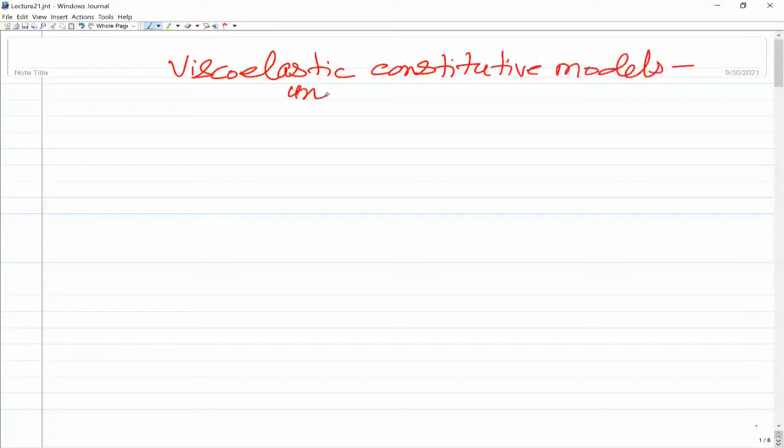Viscoelastic constitutive models, and this we will do for uniaxial state of stress. And then of course we will generalize it to the three-dimensional case.

So the simplest model is what is known as the Kelvin-Voigt model. The material is there as it is. These are different models that are available, and we can use for the simulation. So first is this Kelvin model.

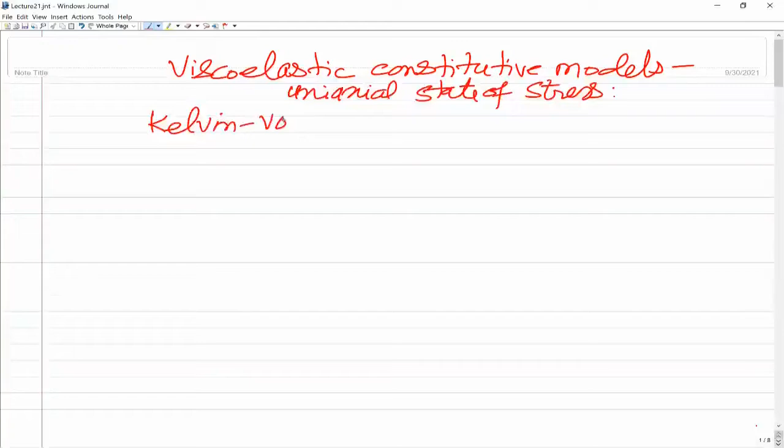Sir, are these based on experiments? Yeah, yeah, ultimately yes. You have to predict correctly the creep behavior along with the stress relaxation behavior. So people have proposed different models, and which model can predict what accurately - the final choice of the model is based on the experimental comparisons.

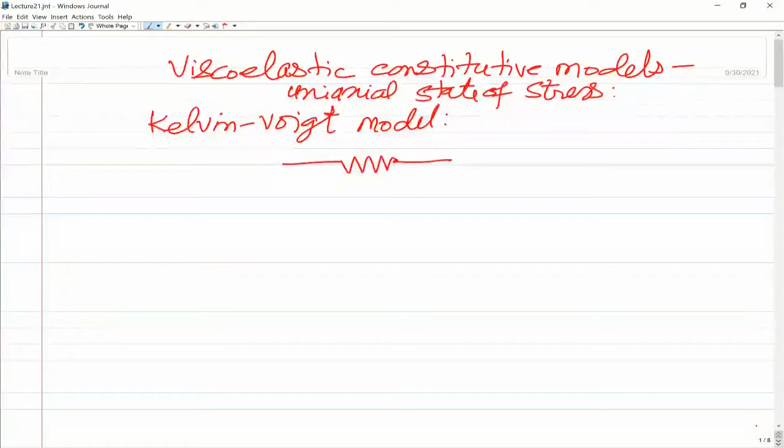So in this model, what is proposed is that you have to have basically the elastic part in it and viscous part in it. The elastic part here is represented as a linear spring, and the viscous part of the behavior is represented by a dashpot, a linear dashpot. So in this Kelvin-Voigt model, the spring - the elastic element - and the viscous element, these two are taken in parallel. So it is assumed that the material behavior can be represented by these two.

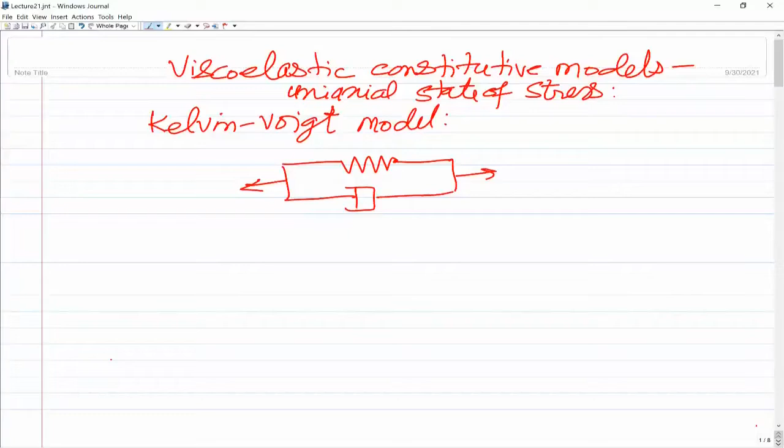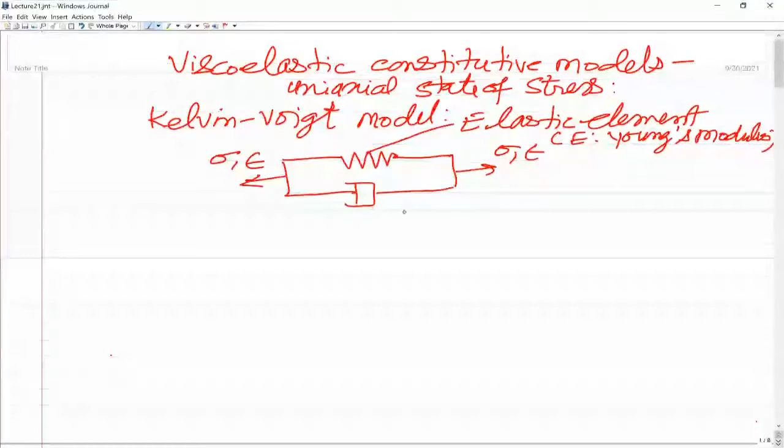So there is a uniaxial state of stress, I'm denoting it as sigma, and the corresponding strain as epsilon. This is the elastic element, as I already said, and let us say the Young's modulus is E. Young's modulus is E for that, and this is the viscous element. Let us say the viscosity of this element is eta. So eta is viscosity.

So in this model, what you will see is that both the elements would experience basically the same strain. The elastic element as well as the viscous element will experience the same strain, but stresses would be different, and the total stress would be the sum of the stresses in the elastic element and the viscous element. So we can say that elastic and viscous elements will experience same strain.

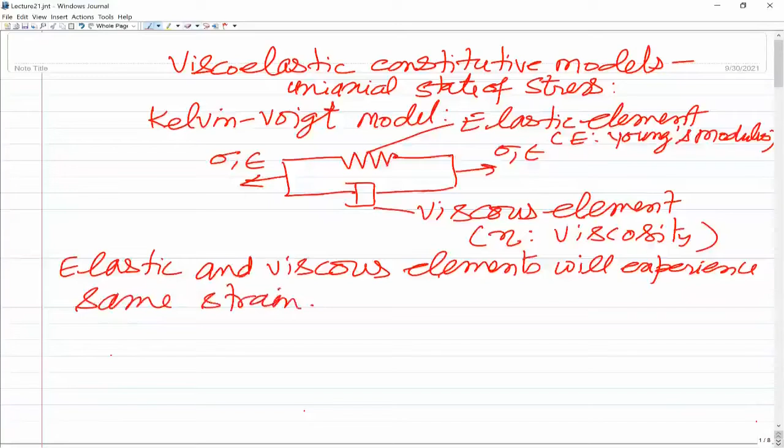So now if you look at the stress in the elastic element, let me denote that by sigma E. The stress in the elastic element would be Young's modulus times strain, and the stress in the viscous element, sigma eta, would be proportional to strain rate - viscosity eta times epsilon dot. So this is for the elastic part, and this is for the viscous part.

Now if you look at the total stress sigma, it will be equal to the sum of the two. Because both elements are in parallel, they will experience the same strain, but the stresses would be different, and the total stress would be sum of stress in the elastic element and the viscous element: sigma E plus sigma eta. Sigma E is E into epsilon, and the viscous element stress is eta into epsilon dot. So this is what you have, and if we divide this by Young's modulus of the elastic element, we can say that sigma upon E would be epsilon plus eta upon E times epsilon dot, and this ratio eta upon E is known as the

stress relaxation or retardation constant. So we can write this also as epsilon plus tau times epsilon dot, where tau is equal to eta upon E, and this is known as the retardation or relaxation constant.

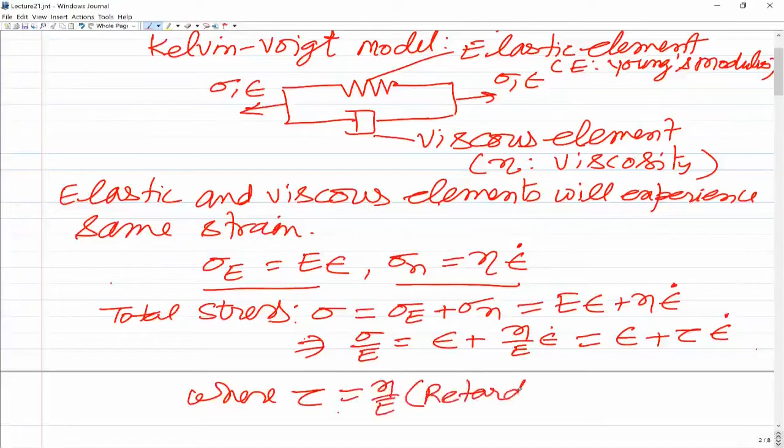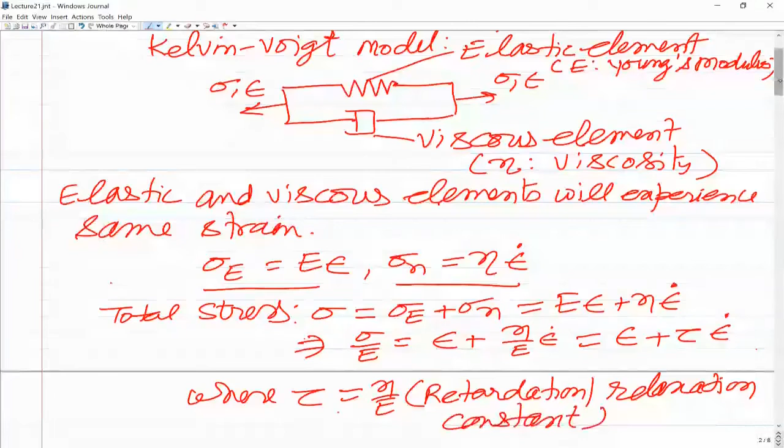So in this case, the constitutive model is sigma equals E times epsilon plus eta times epsilon dot. So you see the stress is a function of total strain and also the strain rate. This is the Kelvin-Voigt model, where stress is a function of strain and strain rate. So these two things are coming into picture here.

Now we want to simulate the same thing, the stress relaxation and creep behavior. So let us see that. Let's look at the response of this model under constant stress. We want to look at creep, whether it is able to represent creep correctly or not. So let us look at that.

So the response under constant stress, and that constant stress is, let us say, sigma naught. So what we are saying basically is that total stress is sigma naught. From the constitutive relation we have sigma naught equals E times epsilon plus tau times epsilon dot. So this is the relationship we have.

Now we want to solve for the strain as a function of time, since stress is constant. So in this, the initial condition would be that epsilon is equal to 0 at t equal to 0. So initially say the strain is 0.

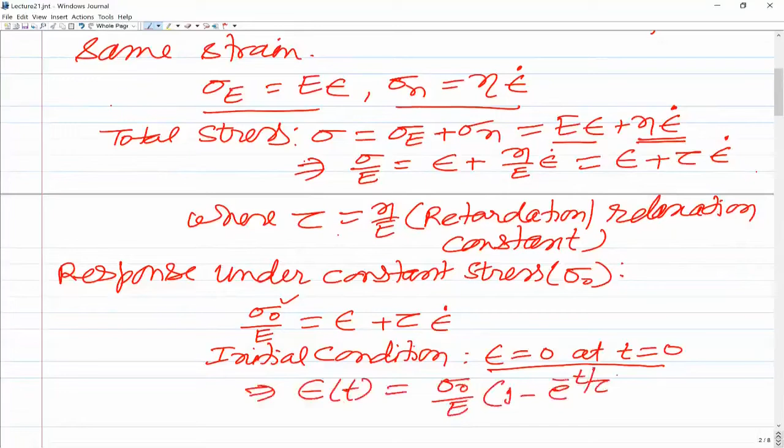If you solve this, this is a first order differential equation with this initial condition. Sigma naught is constant, applied constant stress throughout the time duration considered. So this is a first order differential equation. The solution will consist of the complementary function and the particular integral, and then the constant can be evaluated using this initial condition. If you solve this, you will see that the solution for epsilon comes out as epsilon(t) equals sigma naught over E times, quantity 1 minus e to the power minus t over tau. So this will be the solution of this equation.

Hello, sir. Sir, viscous stress, as we read in undergraduate, it is shear stress, and the elastic stress that we are using, it is normal stress. So can we add it directly?

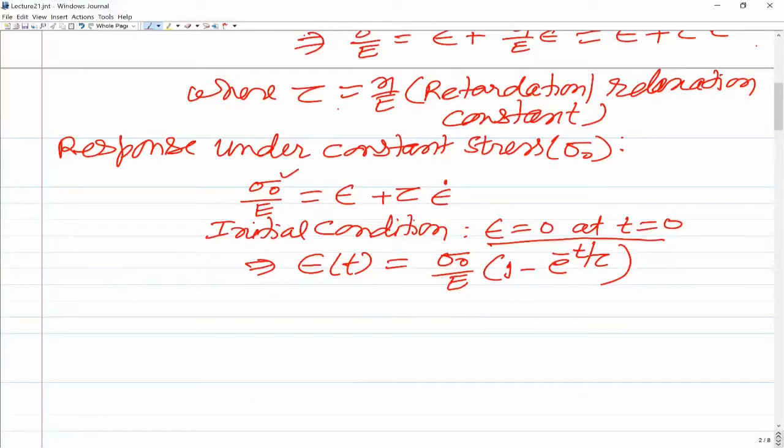No, both of them are normal stress here. We are not talking about shear stress, we are talking about normal stress. In both cases these are normal stresses. Normal stress in the elastic part is sigma E, and normal stress in the viscous part is sigma eta. So both of them are normal stresses. We are looking here at the behavior under uniaxial normal stress, not shear. Of course, you can also write the similar thing for shear. If it is subjected to shear stress and shear strain, you can have a similar relationship that tau equals tau_e plus tau_eta. So this is for normal stress. Okay sir, so both are normal stresses.

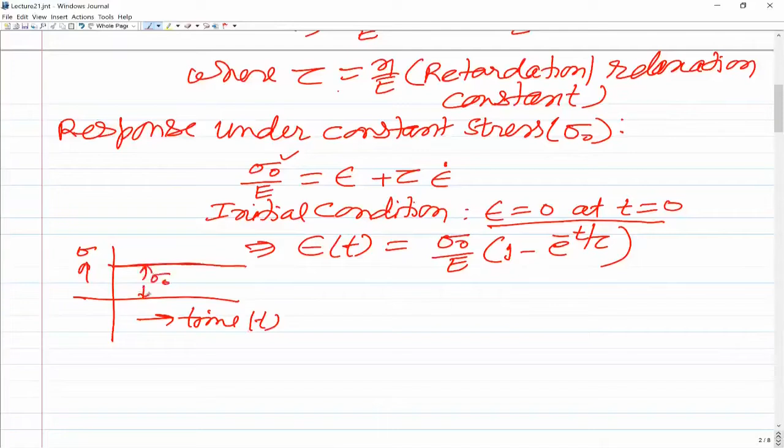So this is the solution. That means if you look at the stress on the vertical axis and time on the horizontal axis, stress is constant and the value is sigma naught. And if you look at the strain response, from the solution we got, the strain at t equal to 0 is 0, and then it increases with time exponentially. So this is how the strain response looks. So you can see that the creep is represented correctly in this model.

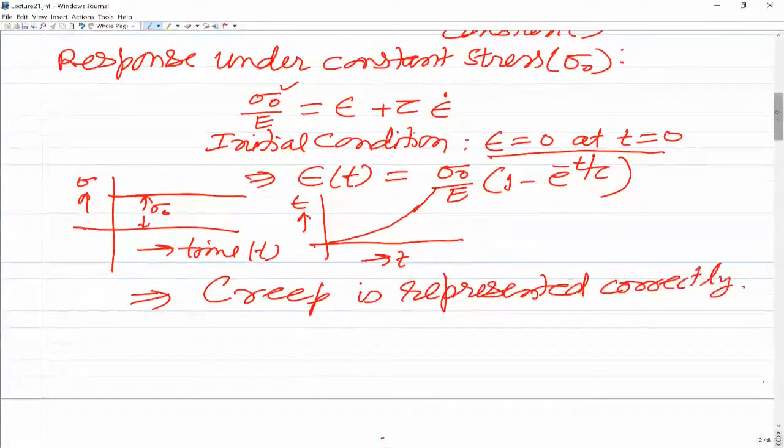The Kelvin-Voigt model represents creep correctly. So the conclusion from this is that creep is represented correctly. Now, if we look at the same model's response under constant strain, that's the second case. These are the two simple cases we can think of, although actual scenarios may be much more complex, so we'll have to look at that. But first, we are talking of the simple cases. So, the response under constant strain.

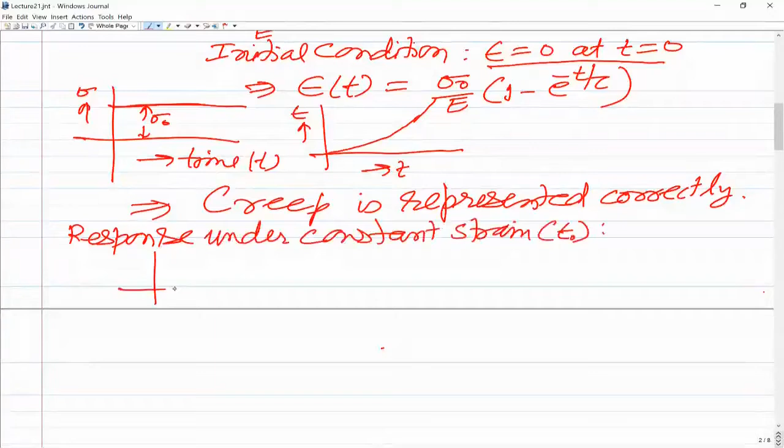Let us say that strain is epsilon naught, so epsilon versus t, and epsilon is constant, equal to epsilon naught. The governing equation is the same, sigma upon E equals epsilon plus tau into epsilon dot, for the Kelvin-Voigt model. Now because epsilon dot is 0, since strain is constant, this term becomes 0. So strain is epsilon naught, sigma is equal to E into epsilon naught. So if we subject this to a constant strain, it will experience a constant stress of E into epsilon naught.

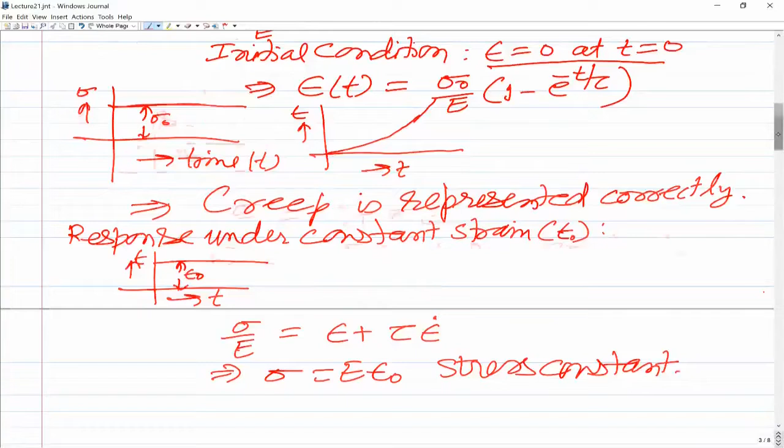So that means the stress is constant, whereas what we want is that it should depict stress relaxation. So you can see that the Kelvin-Voigt model is not sufficient. It represents creep correctly, but not stress relaxation. So the conclusion is that stress relaxation is not represented correctly.

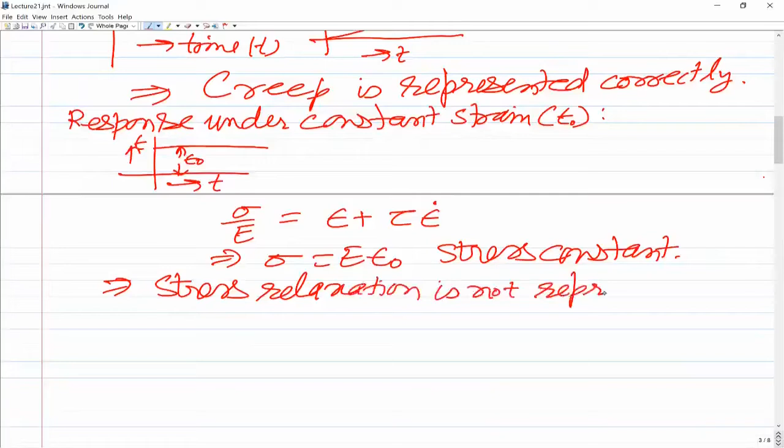So then one more model is known as the Maxwell model. These are two simple models.

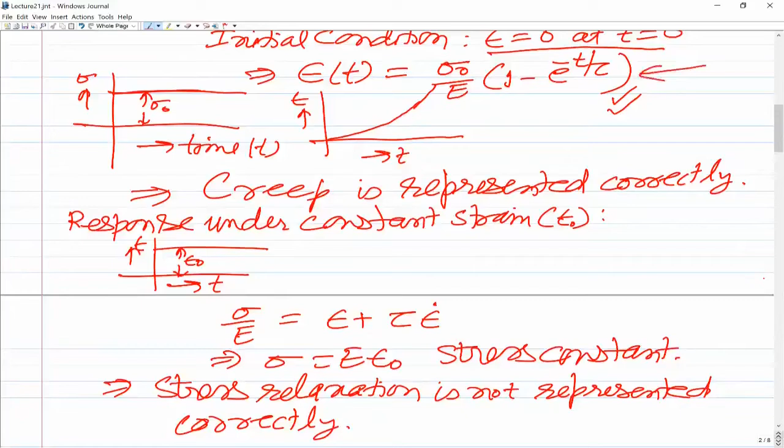So then the other model is known as the Maxwell model. In the Kelvin-Voigt model, the elastic element and the viscous element are in parallel, and in the Maxwell model they are considered in series. These viscous and elastic elements can either be taken in parallel, which is the Kelvin-Voigt model, or in series, which is the Maxwell model.

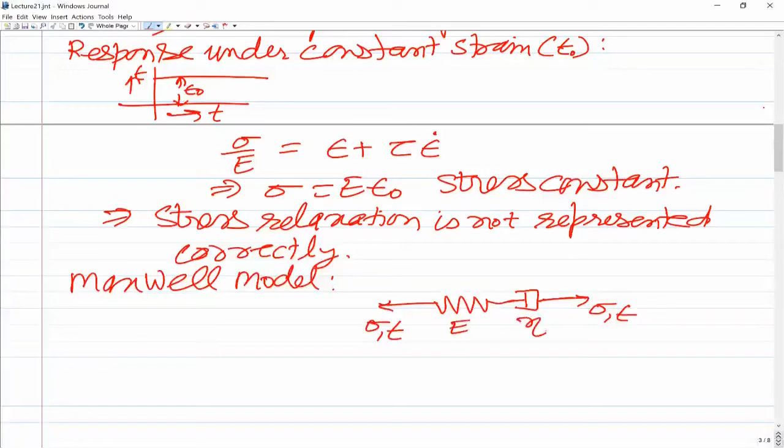In the Maxwell model, the elastic element and the viscous element are in series. The total stress is sigma and strain is epsilon. The elastic element has Young's modulus E, and the viscous element has viscosity eta. Both elements experience the same stress, but the strain is different. So the total strain would be the sum of strain in the elastic element and the viscous element.

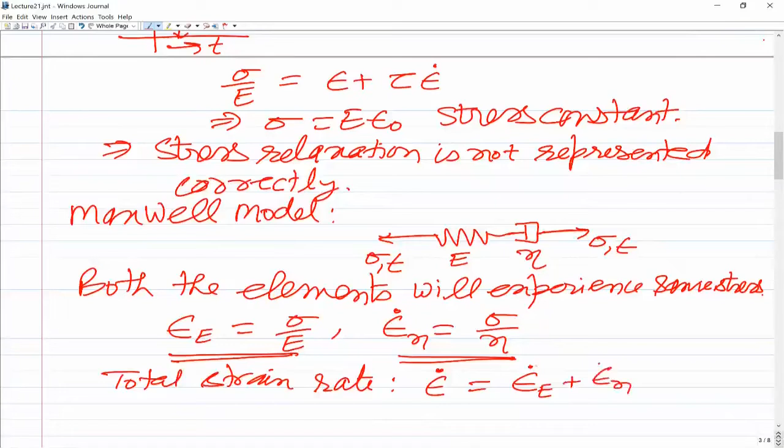Now if you look at the strain in the elastic element, since stress is same, that would be sigma upon E. And the strain rate in the viscous element, related to stress, would be epsilon dot eta equal to sigma upon eta. So now if we look at the total strain rate: epsilon dot equals strain rate in the elastic part plus strain rate in the viscous part. In the elastic element, since E is constant, the strain rate is sigma dot upon E, and in the viscous element it is sigma upon eta. So this is epsilon dot for this model.

Now we can rewrite this. If you multiply both sides by E, you can write this relationship as E into epsilon dot equals sigma dot plus, since E upon eta is 1 upon tau, sigma upon tau, where tau is eta upon E, the same definition we took in the Kelvin-Voigt model.

Now if you look at the response, again we want to see whether it can model creep and stress relaxation correctly or not. So let's again look at the response under constant strain, and let us say that strain is epsilon naught. Now the strain rate is 0 because strain is constant, so this will give you sigma dot plus sigma upon tau equals 0.

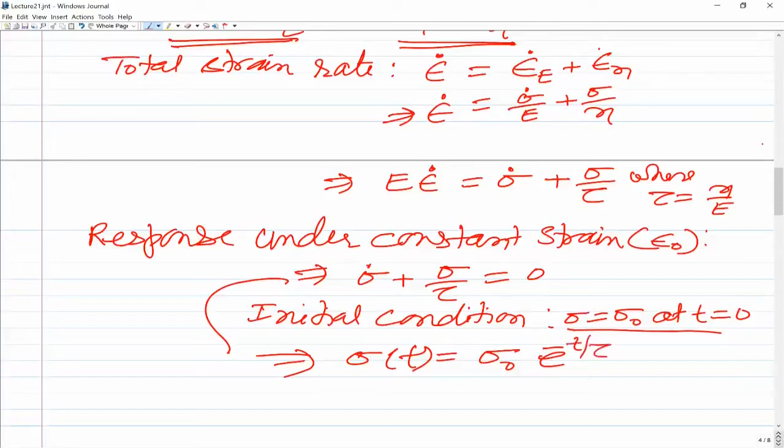So the final solution would be sigma as a function of t equals sigma naught into e to the power minus t upon tau. So at t equal to 0, sigma is sigma naught, and then it decreases with time.

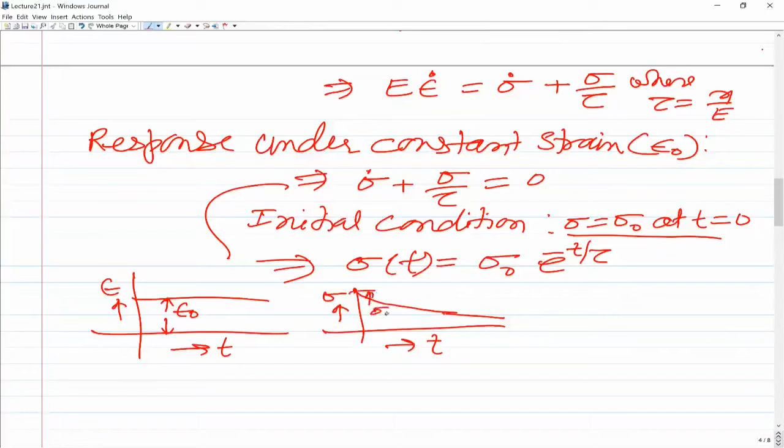Now if you look at the graph, what this represents: we have epsilon on one side and time on the other, and strain is constant, equal to epsilon naught. If we look at the corresponding stress sigma versus t, you will see it represents a behavior like this, starting at sigma naught. So you can say that in the Maxwell model, stress relaxation is represented correctly.

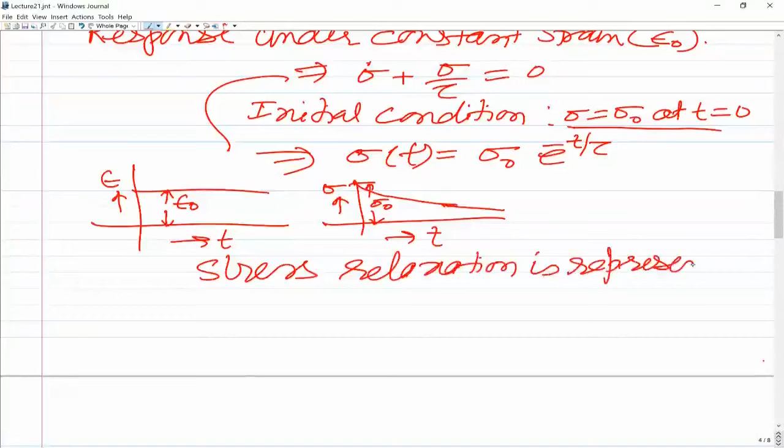So the conclusion is that stress relaxation is represented correctly. Now let's look at the creep.

That is the response under constant stress. Let us say that stress is sigma naught. So we will have, because stress is now constant, sigma dot is actually going to be 0, and sigma equal to sigma naught throughout the time instant.

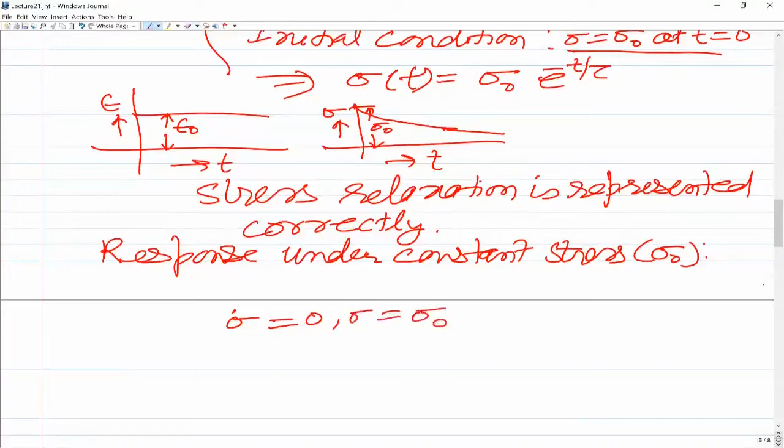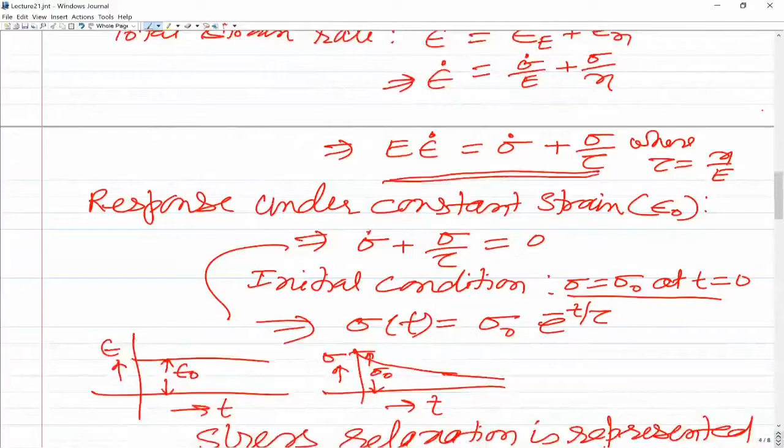Now if you look at this equation, we have sigma dot equal to 0, so E into epsilon dot is equal to sigma upon tau from this equation. If you solve for epsilon, you will get it as a linear function of time. So the solution for the problem would be epsilon of t equals sigma naught upon eta into t.

We are of course assuming that epsilon is 0 at t equal to 0. That's the initial condition, so the solution of this differential equation is this. So what you see here is that with constant stress, the strain is increasing with time, but it is linear, whereas what is observed experimentally is that it is also exponential.

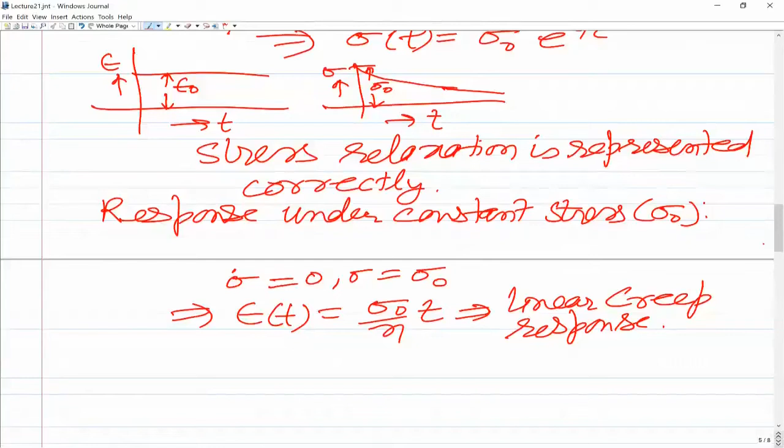So it is representing a linear creep response. Neither the Kelvin-Voigt model nor the Maxwell model are capable of representing both stress relaxation as well as creep correctly. So we need a different model.

So one of the popular models is known as the standard model. A standard model means we take elements in parallel and also in series involving viscous and elastic elements. So in the standard model, also known as the 3-element model...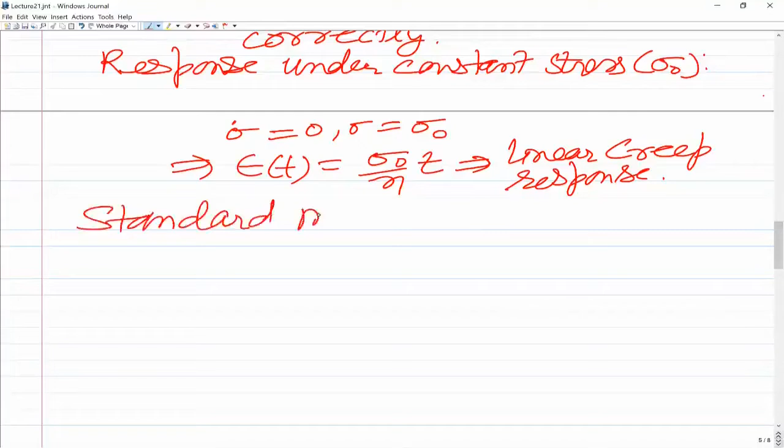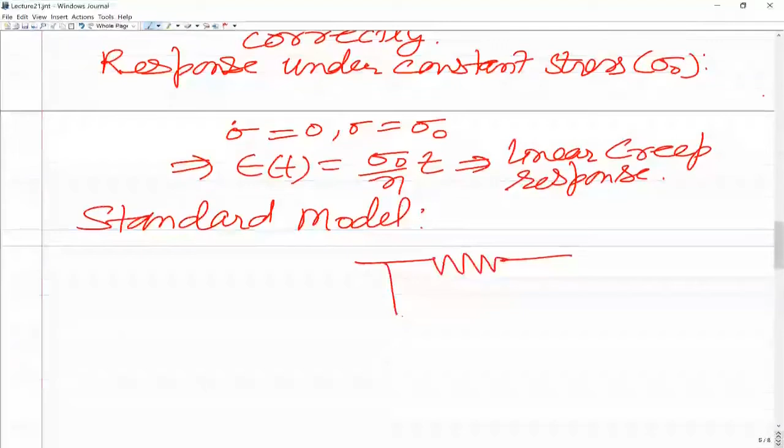In this model, what is proposed is that you have one elastic element, and together with this elastic element you have another element which has an elastic part and a viscous part in series, and then you subject them to stress and strain, sigma and epsilon, sigma and epsilon.

The one which is purely elastic, its Young's modulus is denoted as E infinity, because for this model, if you look at the effective Young's modulus at infinite time instance, it would be just equal to the Young's modulus of this part. This is because the elastic and viscous elements are in series, so it is like a Maxwell model, or part of it is a Maxwell model. Let us say the elastic element has Young's modulus Em, and the viscous element has viscosity eta m.

And the stress experienced - we will see that both parallel branches will experience the same strain but different stresses. Let us say the stress in this one is sigma infinity, and the stress in this one is sigma m. So you can say that this is basically one elastic element and one Maxwell element in parallel - this is the Maxwell element.

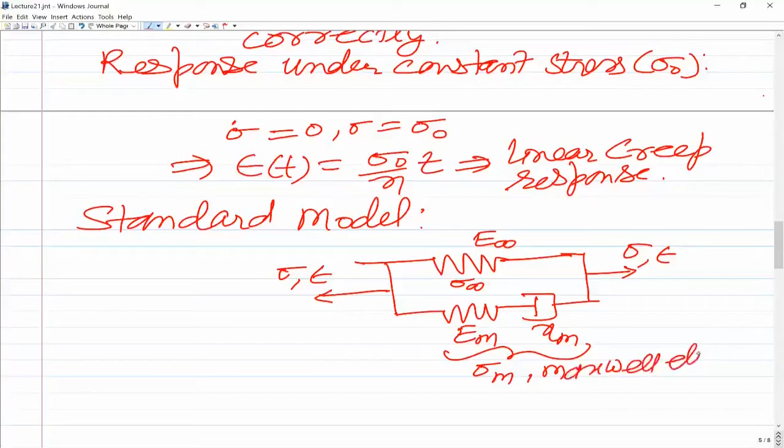So this is the model you have. Now let's look at the differential equation, the relationship between stress and strain. For the Kelvin-Voigt model we had seen the stress-strain relation, and for the Maxwell model we have seen the stress-strain relation. Now let's look at the standard model.

Now if you look at the total stress, it is going to be the sum of stress in each element. So sigma would be equal to sigma infinity, the stress in this element, plus the stress in the Maxwell part, which would be sigma m.

Both the elastic element and the Maxwell element are going to experience the same strain. So the stress in the elastic element is going to be E infinity into epsilon, since the strain is the same in both elements, plus sigma m.

For the Maxwell element, if you look at the strain rate, the strain rate experienced by the elastic and Maxwell elements are going to be the same.

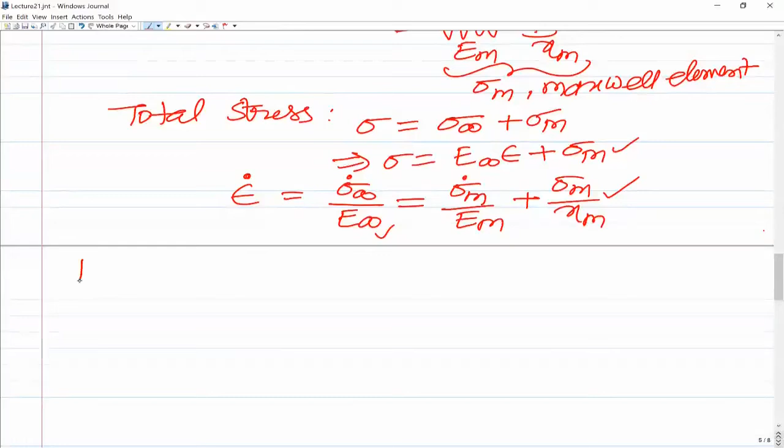Now we want to study the response under constant strain and the response under constant stress. First let's look at how the standard model behaves under the response under constant strain.

Yes please, any question? I think your voice is not audible. Somebody wanted to ask a question, but your voice is not clear.

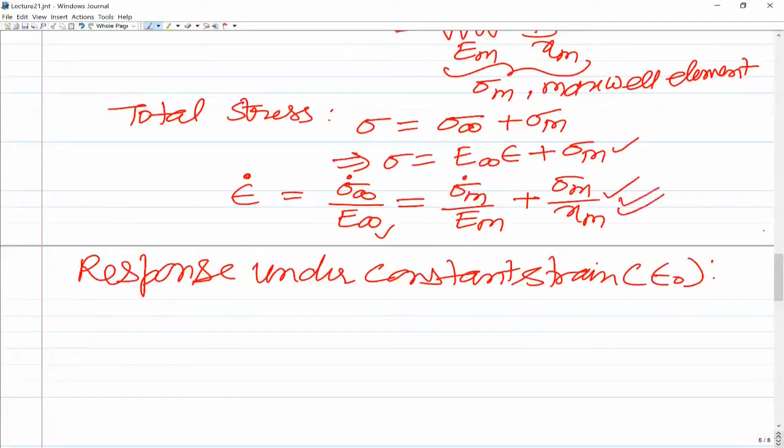If we are looking at the response under constant strain, basically epsilon dot is 0, so epsilon is equal to epsilon naught and epsilon dot is 0. If epsilon dot is 0, from this equation you can solve for sigma m, because it is again a first order differential equation in sigma m. Then the stress in the elastic part is already E infinity into epsilon naught, so you can get the total stress.

The total stress would be sigma equals E infinity times epsilon naught plus sigma m, and sigma m is solved from this differential equation, where epsilon dot is 0 because epsilon is constant equal to epsilon naught. The solution, with initial stress in the Maxwell element as sigma m naught, would be sigma m naught into e to the power minus t upon tau.

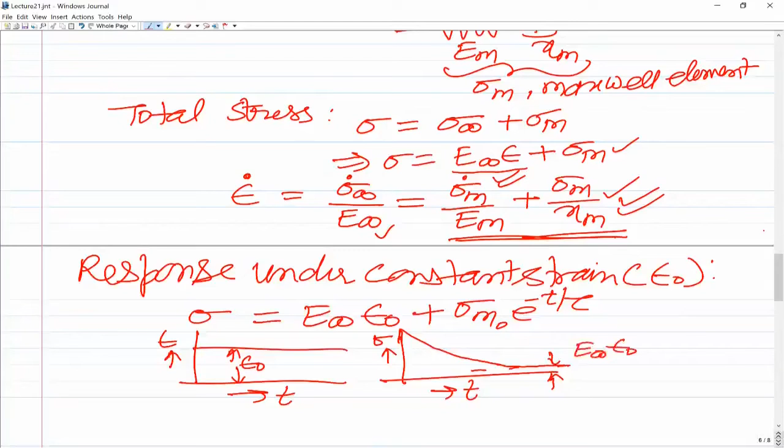If you look at the plot, we have strain on one axis and time on the other, and strain is constant, equal to epsilon naught. If you look at stress versus time, the initial stress is basically the sum of these two stresses, at a higher level, and then it will decrease, finally giving a response like this. The steady state response, finally, is going to be E infinity into epsilon naught.

Under constant strain, this model is representing stress relaxation - stress is reducing. So you would see that stress relaxation is represented correctly in the standard model.

Now let's look at, for the same model, the response under constant stress. These are the two basic things we are first looking at - for the different models, we are trying to see how they predict the response under constant stress and strain.

So response under constant stress, that is sigma naught, sigma equal to sigma naught, and sigma dot is 0.

So now if you look at this relationship, we have already seen that stress is constant, so sigma naught is going to be sigma infinity plus sigma m. Now if you want to write sigma infinity, you can write it in terms of sigma naught minus sigma m.

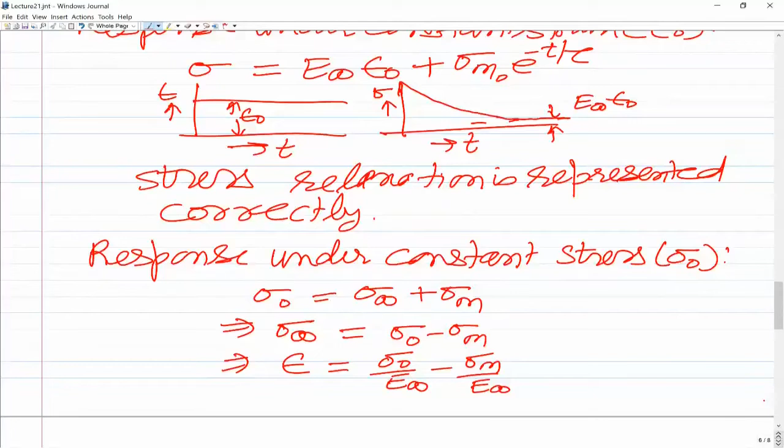And then if you want to write the strain, because we know that the elastic element and the Maxwell element are experiencing the same strain, I can get epsilon by dividing the whole equation by E infinity. So epsilon would be sigma naught upon E infinity minus sigma m upon E infinity, because sigma infinity is E infinity into epsilon.

Now if we look at the strain rate, the differential form of this, epsilon dot will be equal to minus sigma m dot upon E infinity, since sigma naught is constant. This is an alternative way of writing the strain rate from the elastic element of this standard model.

But we know this relationship, that epsilon dot is purely written in terms of the Maxwell element in the standard model, that is this equation. You can see that this epsilon dot is also equal to sigma m upon eta m plus sigma m dot upon em. So we can also write it like this. So these are two alternative ways of writing epsilon dot: this we have already seen, and this is an alternative way.

So now if you combine these, you can actually write this equation as sigma m upon tau m. If you multiply the whole equation by em, you get it as sigma m upon tau m plus sigma m dot into 1 plus em upon e infinity. I think this is straightforward, the relationship you can derive.

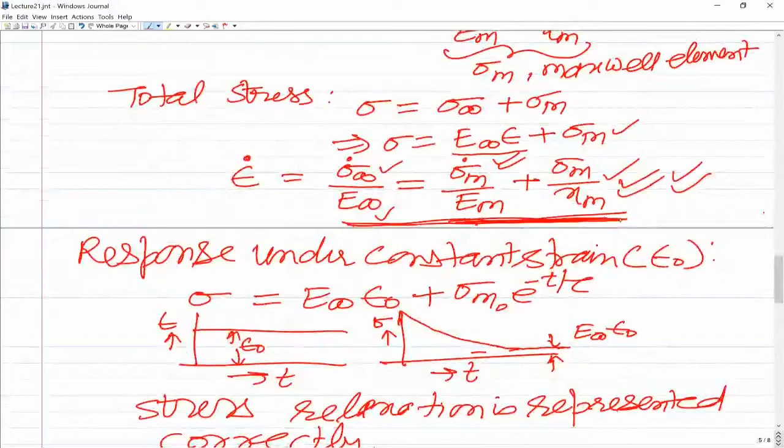So now from this relation to this, and then the strain rate, the other alternative way, we have already written the strain rate for this element over here. Now this relationship, one way of writing is this, another way of writing is epsilon dot is this. So I'm basically considering this equation, and that equation can be written like this.

Now if you look at the solution of this equation, again assuming that, in this case this is a first order differential equation in sigma m. So you can solve for sigma m, and once you have sigma m, from this relationship you can get your strain. I am leaving the solution to you: first solve this differential equation for sigma m, and then from this you get your epsilon.

So that will give you epsilon(t) equal to sigma naught upon E infinity, that is this term, and the second term is... and of course while solving this equation you assume that sigma m is equal to sigma m naught at t equal to 0. That would be your initial condition. So when you solve this equation, take sigma m equal to sigma m naught at t equal to 0 and then solve it.

So you will get sigma m naught upon E infinity into e to the power minus t upon tau m, which is the relaxation constant for the Maxwell element, plus you will have this ratio of Young's modulus of the Maxwell element and the Young's modulus of the elastic element in the Maxwell model. So this is the expression you get, and this will represent the strain increasing exponentially with time. So the conclusion is that creep is also represented correctly.

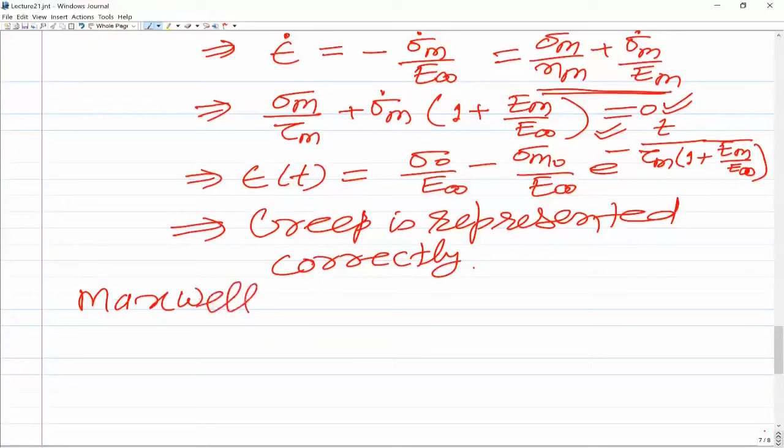Now let me revisit this: can we talk of the response changing with time, in terms of an equivalent modulus as a function of time? For that, let me again revisit the Maxwell model. In the standard model also you have a Maxwell element. So if you look at the Maxwell model, we have seen the response under constant strain.

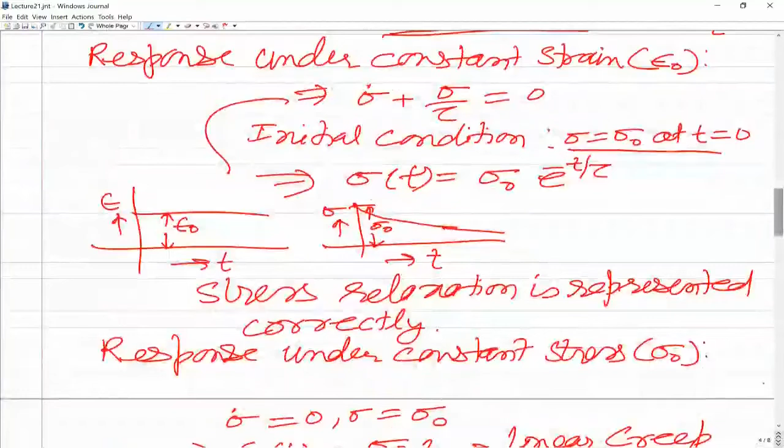This is sigma t equals sigma naught e to the power minus t upon tau, for the Maxwell model.

Now we want to get an equivalent Young's modulus which is a function of time. So we divide this by strain, and strain is constant, so we get Young's modulus, sigma t upon epsilon naught. So Et is sigma t upon epsilon naught, and that will be equal to sigma naught upon epsilon into e to the power minus t upon tau.

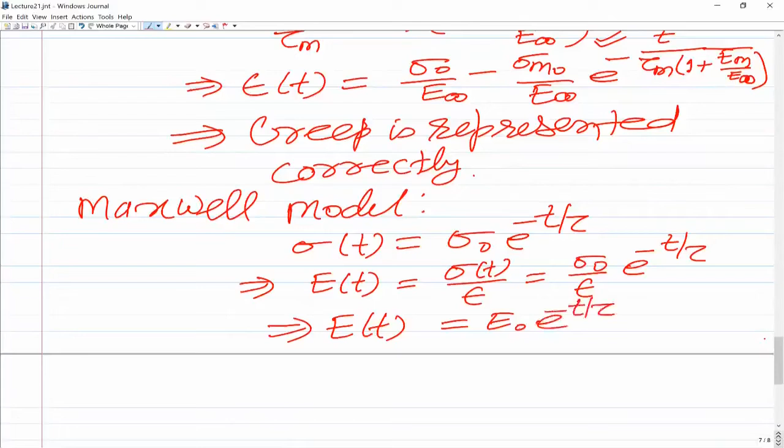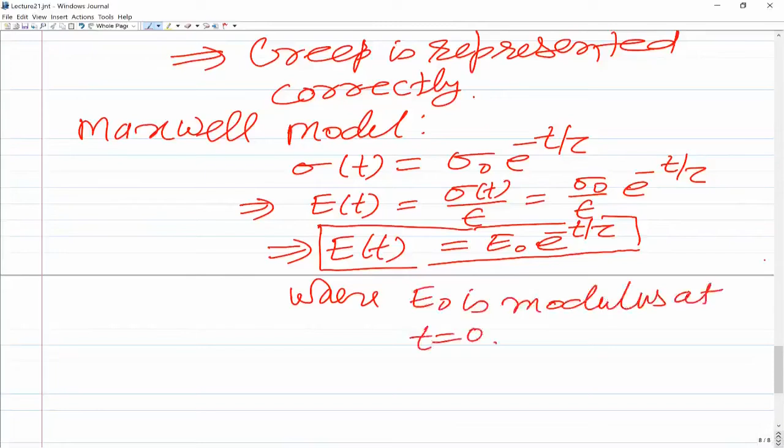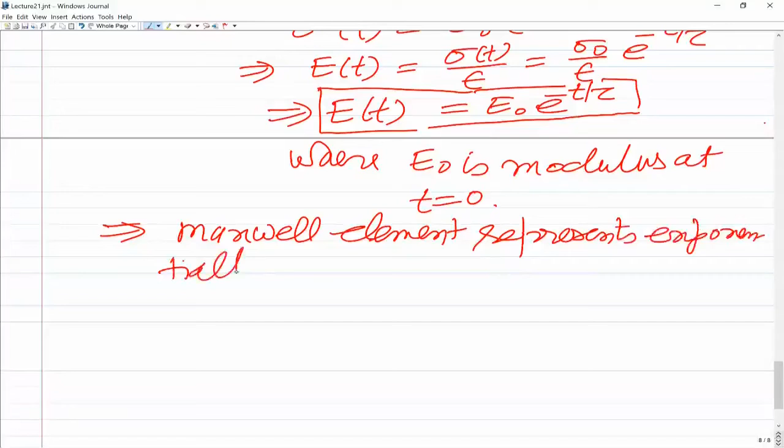This sigma naught upon epsilon is E naught, which is the modulus of the elastic element in the Maxwell model. So we can say that for the Maxwell model, the Young's modulus is changing as a function of time, as E naught into e to the power minus t upon tau, where E naught is the modulus at t equal to 0. So the conclusion is that the Maxwell element represents an exponentially decreasing modulus of the material.

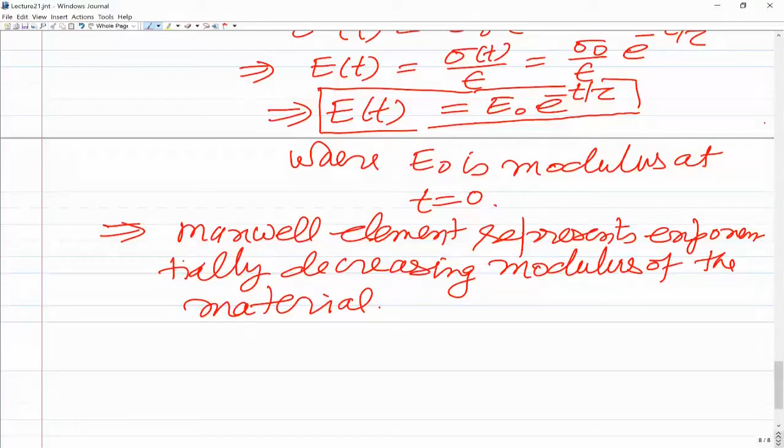So far what we have seen, of course, you can always get an equivalent Young's modulus, whether for the Maxwell element or the standard solid. For the standard solid, if you divide this equation by epsilon naught, sigma by epsilon naught gives Et equal to E infinity plus Em into e to the power minus t upon tau. So for this also you will have an equivalent modulus which is a function of time.

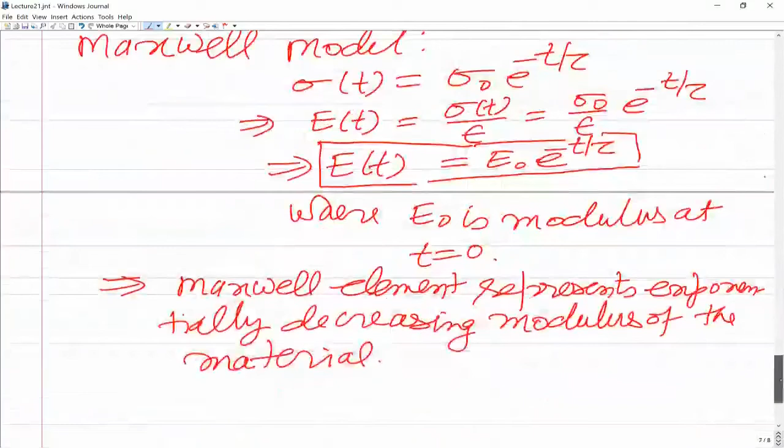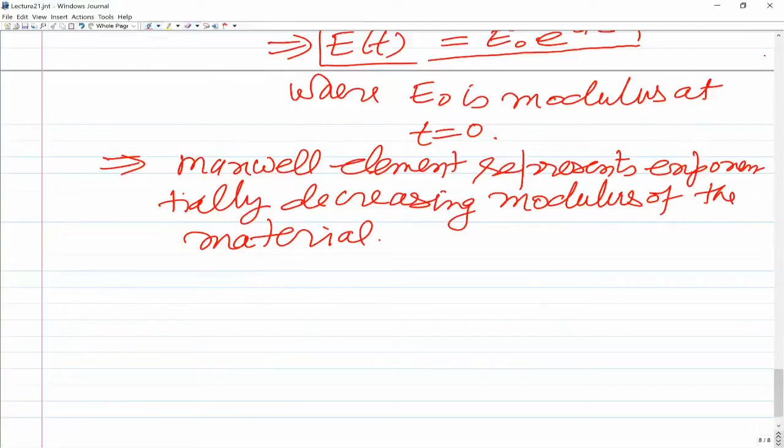Now in all these cases, we have seen the response under constant stress and the response under constant strain. But in a real situation, the strain might be changing with time, and we want to look at the stress which will also be a function of time. For that there is a famous integral given by Boltzmann, known as the Boltzmann integral. Let me briefly talk about how this is arrived at.

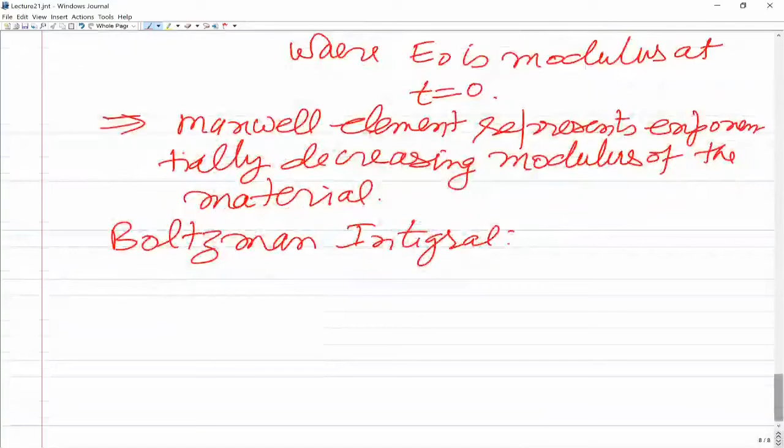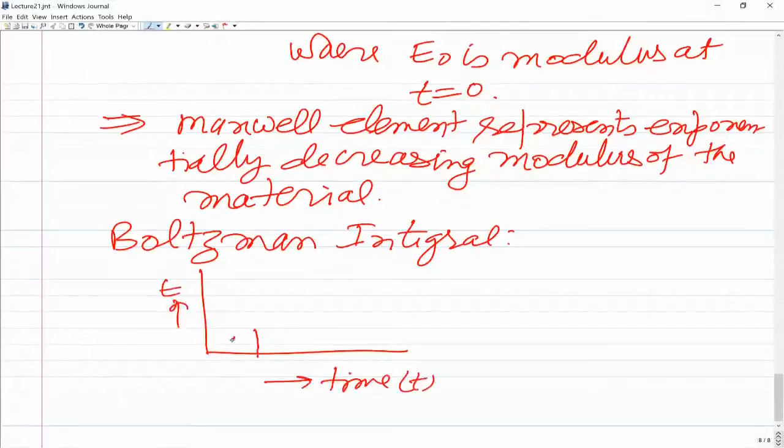In the Boltzmann integral, we start with a hypothetical situation where the vertical axis is strain and the horizontal axis is time t. At some time instant t1, an incremental strain delta epsilon 1 is given and held constant for some time. Then another incremental strain delta epsilon 2 is given and held constant, and then again another strain increment delta epsilon 3 is given and held constant. So you have strain increments at times t1, t2, and t3, and under this we want to look at the stress response at some time t.

If we think of either the Maxwell model or the standard model, since for some time the strain is held constant, what we are looking at here is essentially stress relaxation.

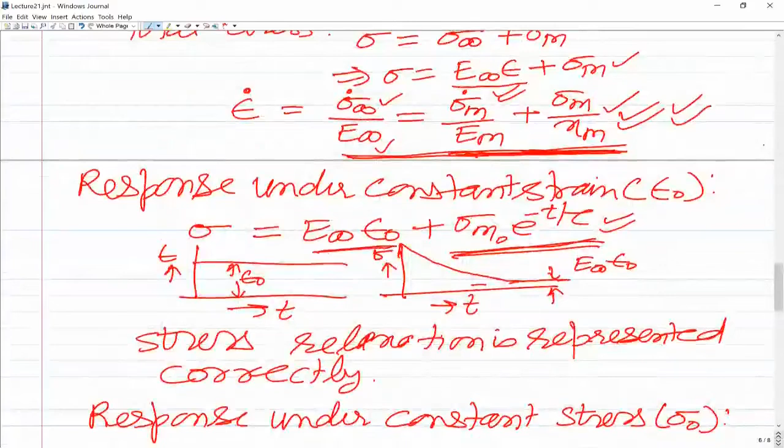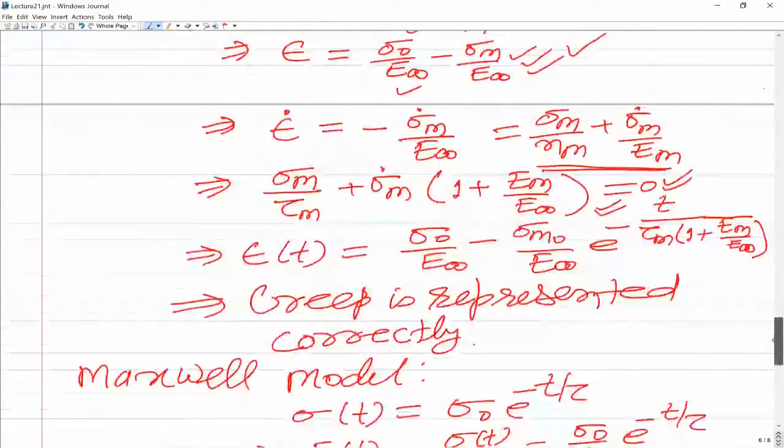So now if we plot the stress for this, the vertical axis is stress and the horizontal axis is time t. Initially, once delta epsilon 1 is applied, looking at the standard model, when a constant strain is applied, there is one constant part of the stress. At t equal to 0, the stress would be sigma infinity plus sigma m naught, and then it would be decreasing with time. So there would be some constant stress, sudden increase in the stress, and then it would decrease in time. You will have this response when the moment delta epsilon 1 is applied.

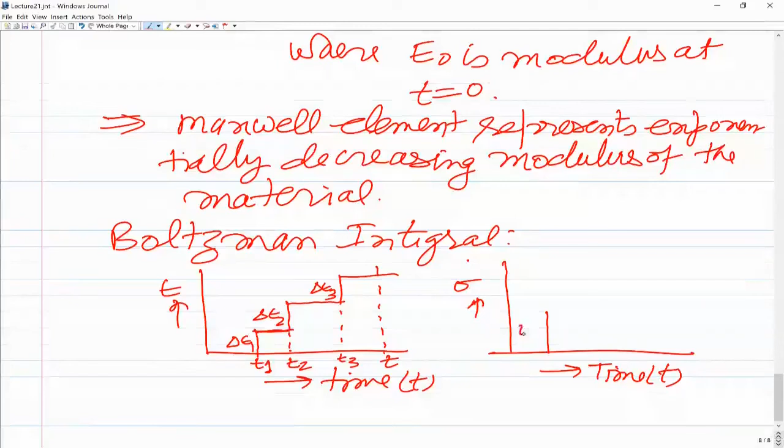So you have this stress, and this stress would be actually equal to E naught into delta epsilon 1. And then because for some time the strain is constant, there would be stress relaxation, so it will go like this exponentially.

Then another strain increment delta epsilon 2 is applied. Because the strain increment is applied at that instant, the material will behave as if at the initial state at t equal to 0. So again this stress increment would be E naught into delta epsilon 2, and then it would decrease. Then you apply another strain increment, so again this increase in stress would be E naught into delta epsilon 3, and then it would exponentially decrease. This is at time t1, this is at time t2, and this is at time t3.

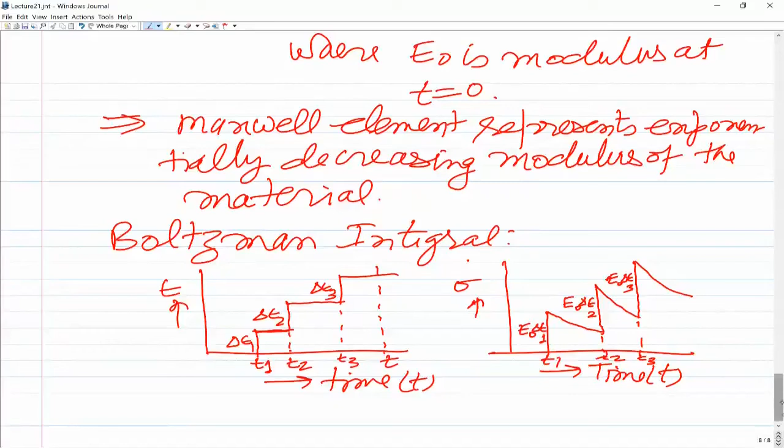So this is how the response would be if you look at this material, this is how it is going to actually respond. Now if I look at the stress increments corresponding to each strain increment, let me write the same thing in terms of equations: stress increments corresponding to strain increments.

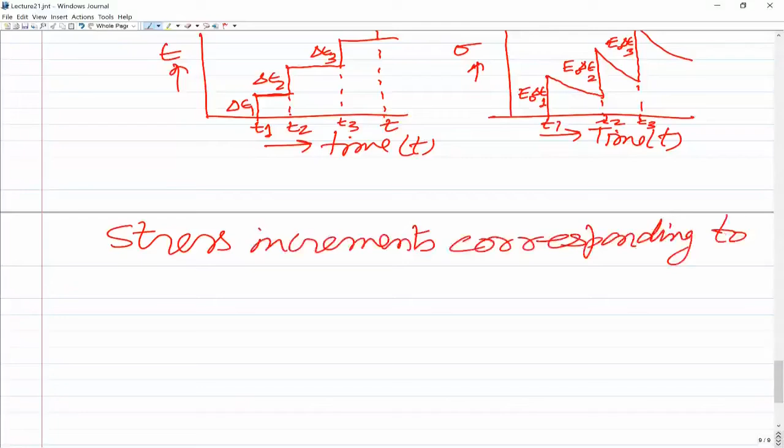First let us say this one is delta sigma 1. I have written it as E naught, that is Young's modulus at t equal to 0. Since Young's modulus is a function of time, if we replace it with t minus t1, at t equal to t1, E would be E naught. So you can write that as E at t minus t1. Just at t1 equal to 0, you will have this as E naught, and subsequently the modulus would be decreasing with time.

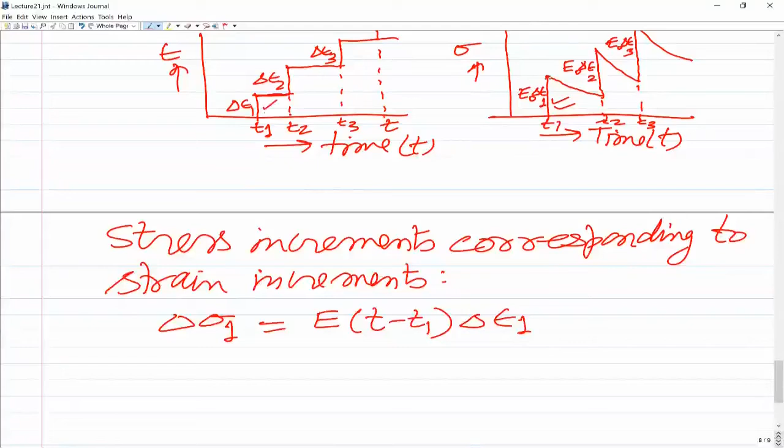So it would be the stress increment due to delta epsilon 1, the stress increment due to this strain increment delta epsilon 1, that is this part of the curve. This part will be represented by this equation.

Similarly, delta sigma 2 will be E at t minus t2, because the strain increment delta epsilon 2 is applied at t equal to t2. So for that part of the strain, it would behave like the Young's modulus at t equal to 0. So we are taking t minus t2. At t equal to t2, E will be E naught, and the stress then would be delta epsilon 2. So that is actually representing this part, and now if you look at this part, it is represented by this equation.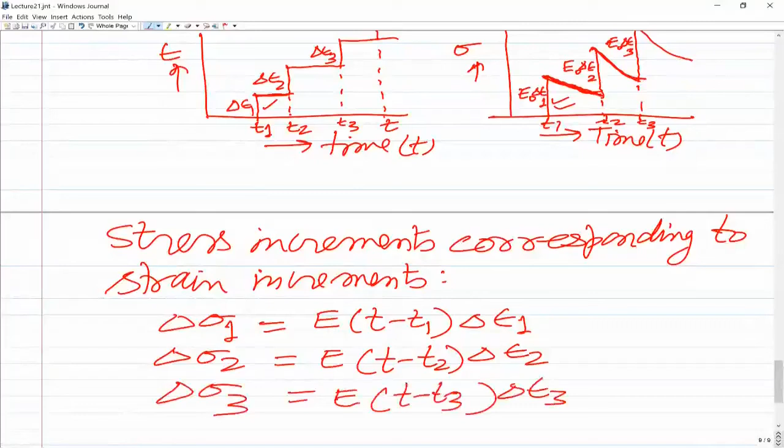Similarly, you can write n number of increments: E at t minus t3 into delta epsilon 3, and like that you can have n number of increments, any number of increments. Now if you look at the total stress at any time t, total stress sigma t would be equal to the summation of all the incremental stresses, which are all functions of time. So you can write sigma t is equal to summation, i going from 1 to n, if there are n strain increments. Then we will have E at t minus ti into delta epsilon i. You can write it like this relationship.

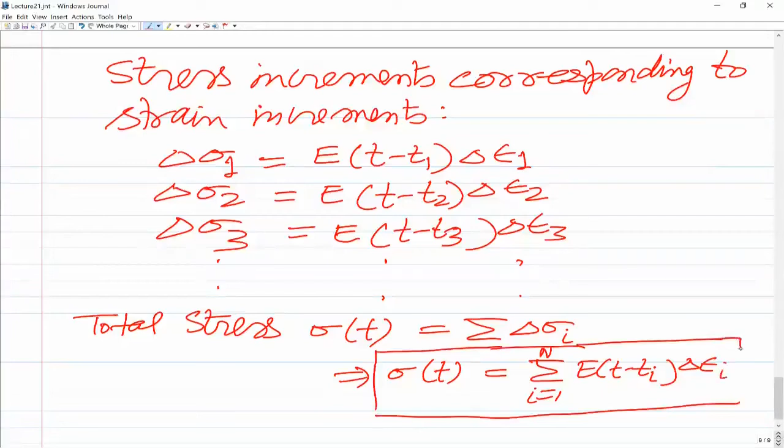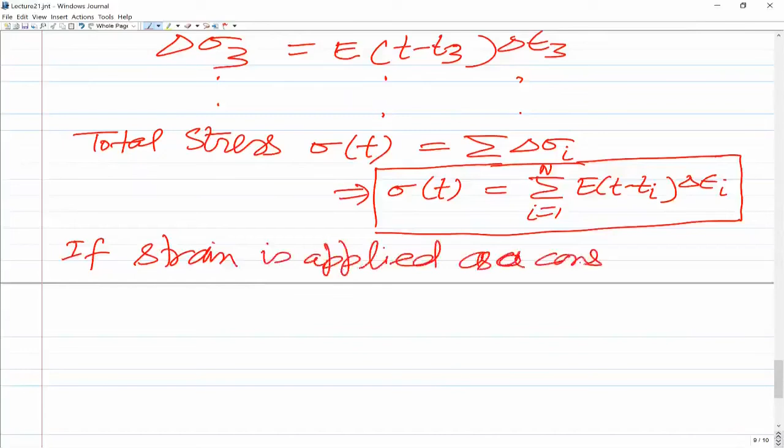Now let us say the strain is a continuous function of time. In this we are assuming that the strain is incremented discretely at discrete time instances. Now let us consider a case where the strain is a continuous function of time, so we want to generalize this relation. If strain is applied as a continuous function of time, then this summation would be replaced by integration.

So then what will happen is that sigma t in that case will be replaced by: sigma t would be the integration from 0 to t, summing all the strain increments up to time t. Since it is a continuous signal, you write it as E of t minus t dash, into d epsilon. So the integration becomes this d epsilon term, which you can rewrite.

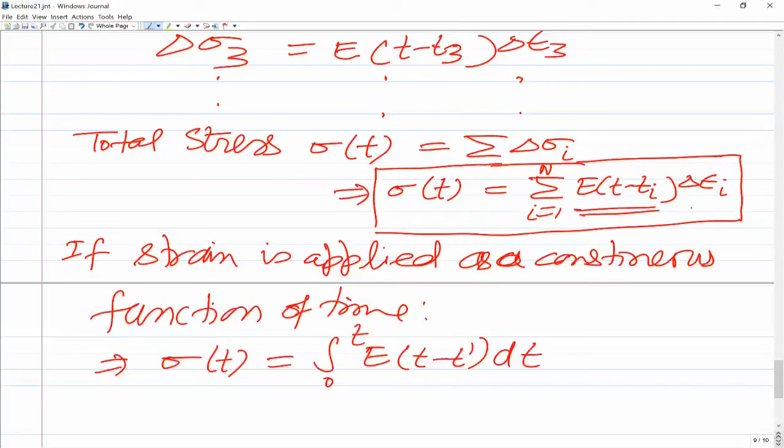So now we are writing ti as t dash, and since strain is a continuous function of time, this increment in strain is replaced by a differential increment. And now you can also rewrite this.

So sigma t can be written as the integration from 0 to t of E evaluated at t minus t dash, which we write as d epsilon by dt dash, into dt dash. So now this is the expression for the stress for a general strain.

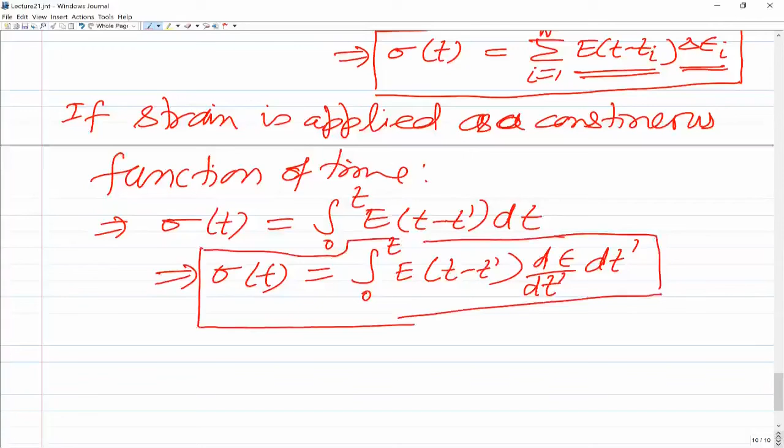When the strain is changing as some function of time, we can use this relationship to find out the stress as a function of time.

If you look at E as a function of time, for the standard model it would be E infinity plus Em, e to the power minus t upon tau m. We can increase the number of elements and increase the accuracy of the model.

Earlier, for the Kelvin-Voigt, Maxwell, or standard model, we represented the relationship between stress and strain in the form of a differential equation. Through this Boltzmann integral, we are able to write the relationship between stress and strain in integral form, whereas earlier we discussed the stress-strain relationship in differential form.

So you can either use the differential forms of the constitutive stress-strain relation, or you can use this integral form. Most of the time, the most popular one is this integral form using the generalized modulus as a function of time, known as the Prony series, where we have more elements.

I already said this comes from the standard model, so let me revisit that standard model and show how we get this E of t as E infinity plus Em term.

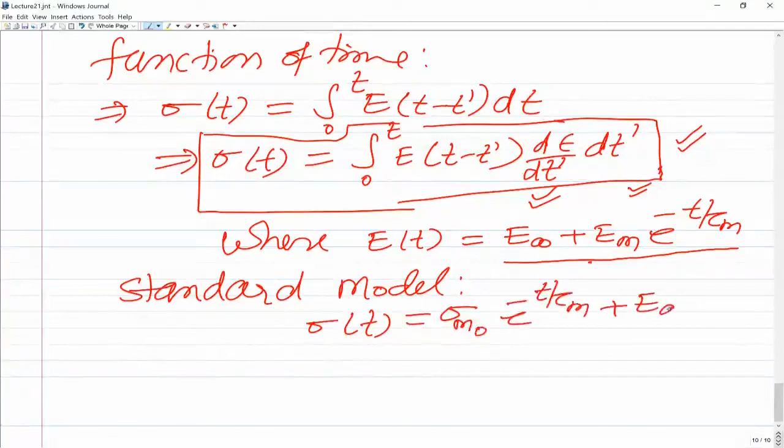If you look at the standard model under constant strain, we have seen that sigma t equals sigma m naught, e to the power minus t upon tau m, plus the stress in the elastic element of the standard model, E infinity into epsilon naught. If you divide this by epsilon naught, you get sigma t upon epsilon naught as E of t.

This term will give you E infinity, and sigma m naught upon epsilon naught will give you Em, which I already wrote as Em e to the power minus t upon tau m. So this is how you get this from the standard model.

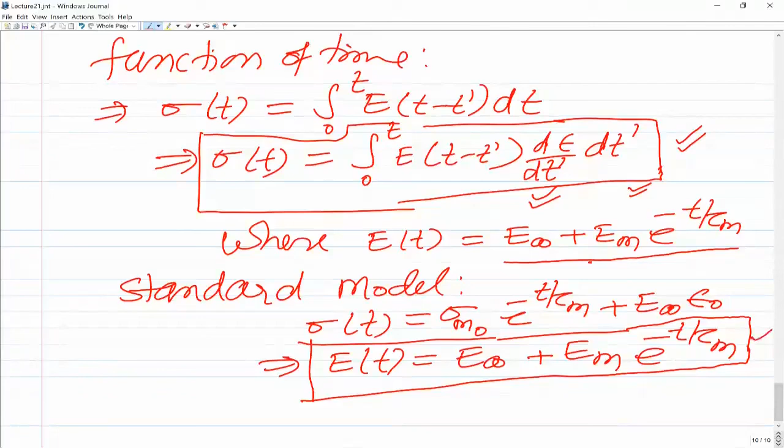Then there is a concept called the Prony series. If you take the standard model, we have an equivalent Young's modulus which is a function of time given by this expression. Qualitatively, this standard model with this equivalent Young's modulus as a function of time will accurately represent stress relaxation and creep, but quantitatively exactly it may not.

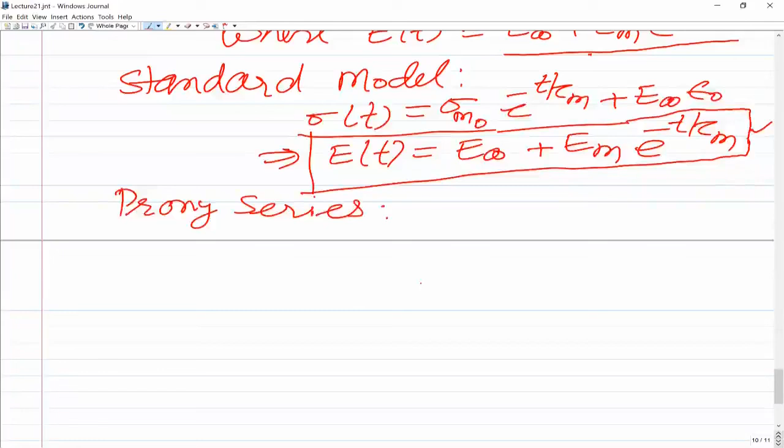So for a better quantitative representation of creep and stress relaxation, we use more Maxwell elements in parallel with the elastic element, and based on that we get an expression for Young's modulus known as the Prony series. Let me talk about this Prony series, which is basically a generalization of the standard model: you have one elastic element, and then multiple Maxwell elements in parallel.

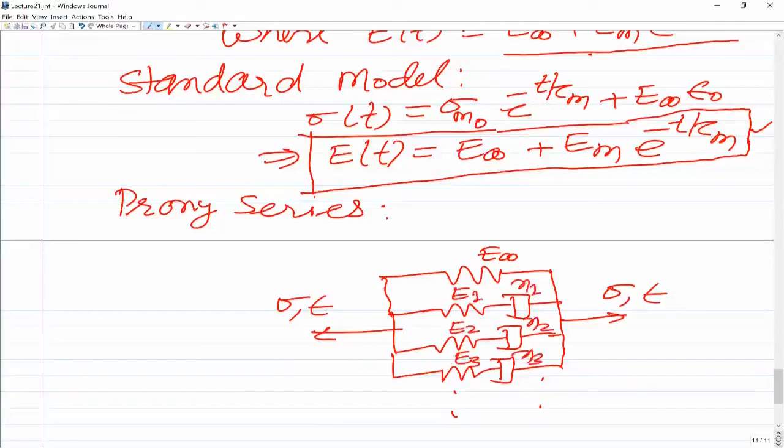So you can have n number of elements in parallel. We are still talking about uniaxial cases, so you will have sigma and epsilon. The Young's modulus of this elastic element is E infinity, which is why it's denoted as infinity, because E at t equal to infinity will be just E infinity - the other contributions will go to 0. Let us say this is E1 and eta1, this is E2 and eta2, this is E3 and eta3, or equivalently the relaxation constants are tau1, tau2, tau3 and so on.

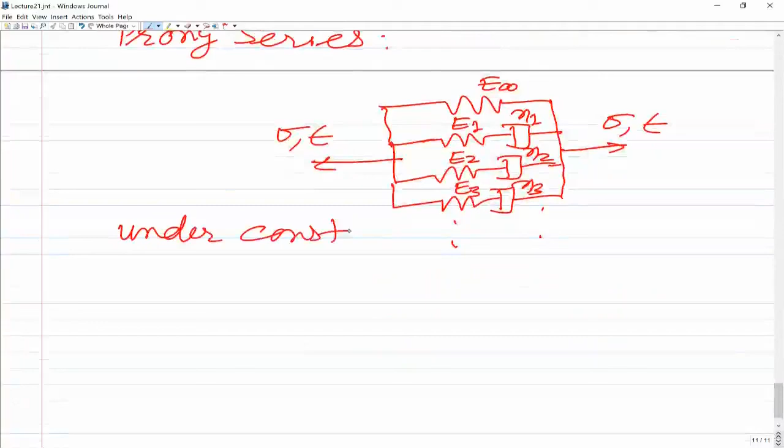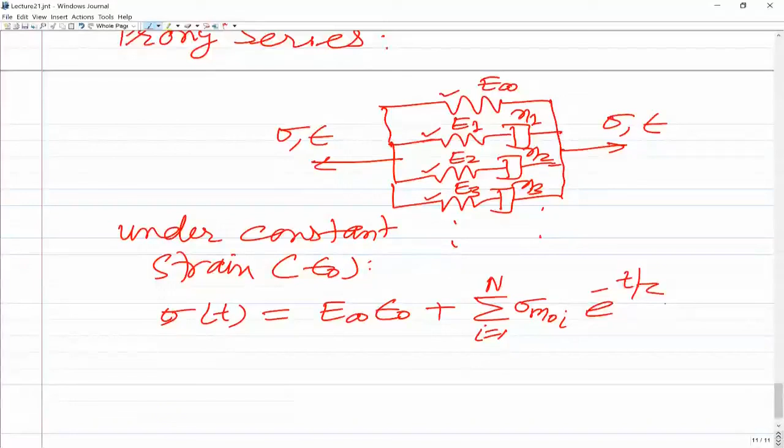So now if you look at the total stress under constant strain epsilon naught, the total stress sigma t will be equal to stress in this elastic element plus stress in this Maxwell element, summed over all elements. So stress in the elastic element would be E infinity into epsilon naught, and stress in each Maxwell element would be sigma m naught I, e to the power minus t upon tau I, where the relaxation constant for each Maxwell element is going to be different - let us say that is tau I.

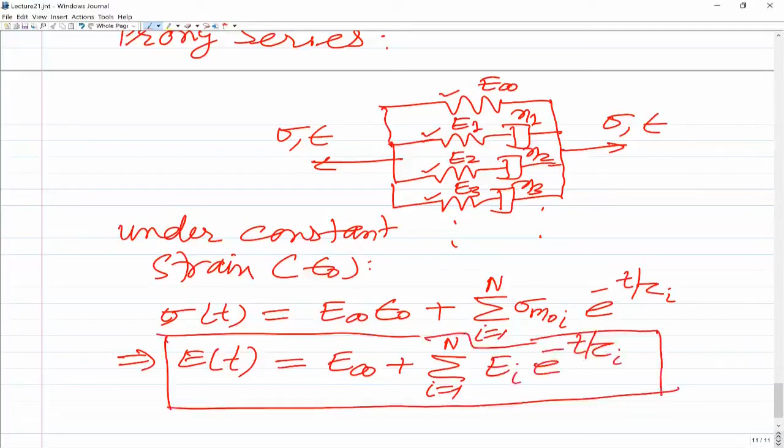So if we divide this by the strain epsilon naught, sigma t upon epsilon naught is the equivalent Young's modulus E, which is a function of time, equal to E infinity plus the summation from I going from 1 to n of EI e to the power minus t upon tau I. This is known as the Prony series. So the equivalent Young's modulus is represented as a function of time with multiple Maxwell elements. Depending on the accuracy level you are looking for, you can choose the value of n.

Minimum value of n is, of course, 1, and maximum you can choose any number of terms depending on the accuracy requirement.

Sir, I have one doubt: are we modeling the complete rigid elastic body by this single element model? Let us say now we have a uniaxial sample - that sample we are representing by so many elastic and viscous elements. It is a cylindrical specimen of certain diameter, represented by a number of these elastic and viscous elements. So this is a mathematical representation of that behavior.

Sir, will that element be made up of multiple Prony series as you have written, or will we have multiple Prony series to represent the whole shape, or will it be only one? No, one Prony series, one Prony series - that is what we are using.

So I think this is where I want to stop. I will continue further on this. If now you have any other questions and doubts, you can ask.